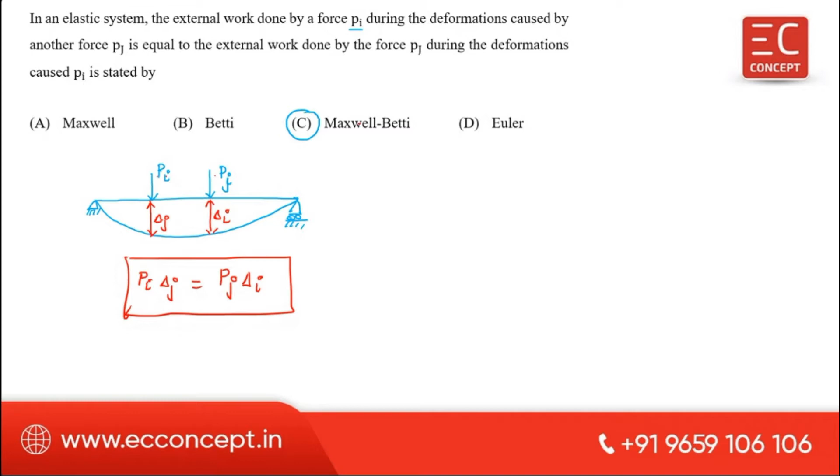What is this delta J? Delta J is the deformation under force Pi due to the force acting at this point. Due to this force, the deformation delta J. Due to this force, deformation delta I at this point. Then we can use the energy principle, load into deformation. So that is what is said by Maxwell-Betti's theorem. Okay. So answer is C.

Now next question. A simply supported beam of span 24 meter is to be designed to carry a central concentrated load of 200 kilonewton. If there is a 40 centimeter dip of the cable at the loading point from the neutral axis, the effective pre-stress is? They are asking effective pre-stress. A simply supported beam of 24 meter span. Designed to carry a concentrated load of 200 kilonewton.

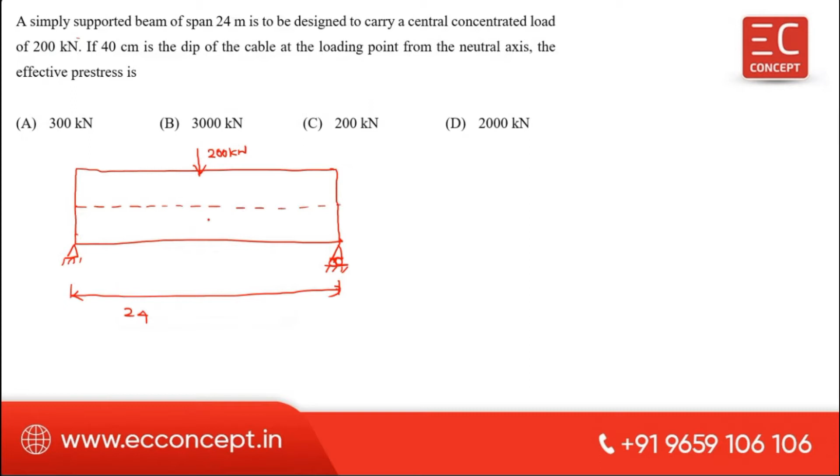A 40 centimeter dip of the cable at the loading point. So this is the neutral axis. Under the loading point, there is a 40 centimeter dip of the cable from the neutral axis. Then the effective pre-stress, this is the cable, okay? The effective pre-stress that was applied is P. Now we know the concept,

the moment due to this P at the center, that is P into e, load into eccentricity, is equal to the moment due to the point load, that is WL by 4. That is P into 0.4 is equal to 200 into 24 divided by 4. 24 by 4 is 6, so 1200 divided by 0.4 is equal to P. So P is 3000 kilonewton. Therefore, the answer for this question is B.

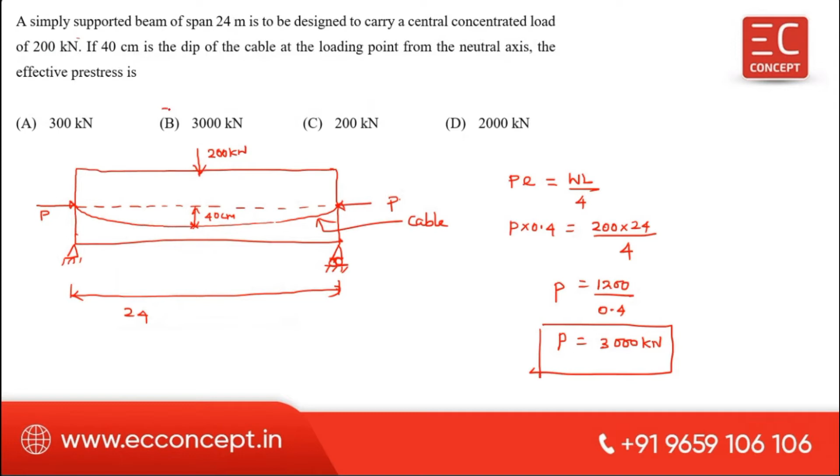Okay, next question. A steel plate 300 millimeter wide, 40 millimeter thick, is connected using 3 bolts of 24 millimeter diameter. The net cross-section area of the plate is calculated as follows. The breadth of the plate is 300 mm. They are asking the net cross-section area of the plate, but there are 3 bolts used: 1, 2, 3. At this section, what is the net cross-section area? And the thickness is 40 mm.

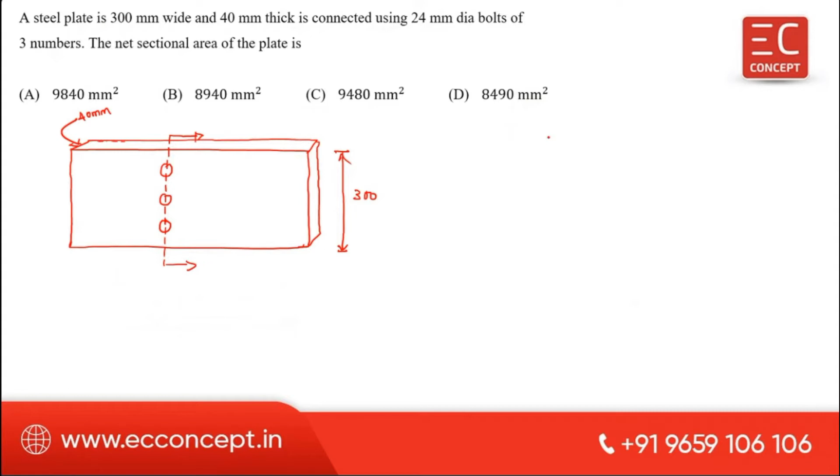So this thickness is 40 mm. So at this point, the net cross-section area A net is equal to total breadth minus number of bolts into diameter of bolt hole into thickness. Here, there are 2 things you have to remember.

For a rivet, up to 25 mm size, diameter of hole is D plus 1.5. Greater than 25 mm, D plus 2. So if the diameter of the rivet is less than or equal to 25 mm, then you have to add D plus 1.5. Greater, then you have to add D plus 2. This is the concept for rivet.

Next one is a bolt. For bolt, there are sizes 12 to 14 mm, 16 to 24 mm, greater than 24 mm. Diameter of bolt hole is equal to D plus 1, D plus 2, D plus 3. You have to add 1, 2, 3. Diameter of hole is calculated in such a way. But now here they have given the bolt, right?

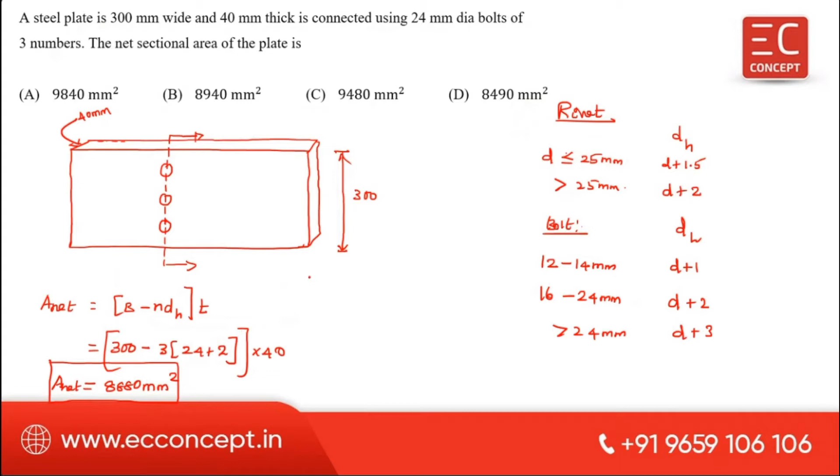So you are getting 8880 millimeter square. This is A net actually you will get. But we don't have this answer. I also checked this by considering the rivet instead of bolt. This question is somewhat vague in nature. As per my perspective, this question is wrong. But anyhow, I solved this question by considering this is the rivet instead of a bolt.

Now A net is equal to 300 minus 3 into the diameter of the hole. 24 is up to 25, so you have to add 1.5 only. Therefore, into 40. So 300 minus 3 into 25.5 into 40. So 3 into 25.5, 300 minus answer into 40. Now you are getting 8940. So this is the answer you are getting.

So we are getting this if we consider this as a rivet. But if we consider it as a bolt, then you have to add 2 with the diameter of the bolt, so that you will get 26. So 26 into 3, 300 minus answer into 40, you are getting 8880. But such an option is not there. But if you use this 1.5, by considering a rivet instead of bolt, then you will get answer B, right?

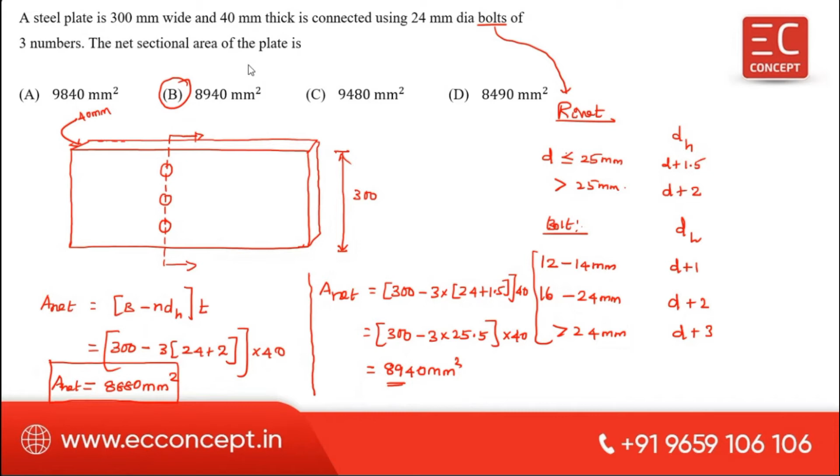Next one. The use of concordant cables in a pre-stressed continuous beam induces on the beam no initial support reaction. So this is the answer for this question. So I can write what a concordant cable profile means.

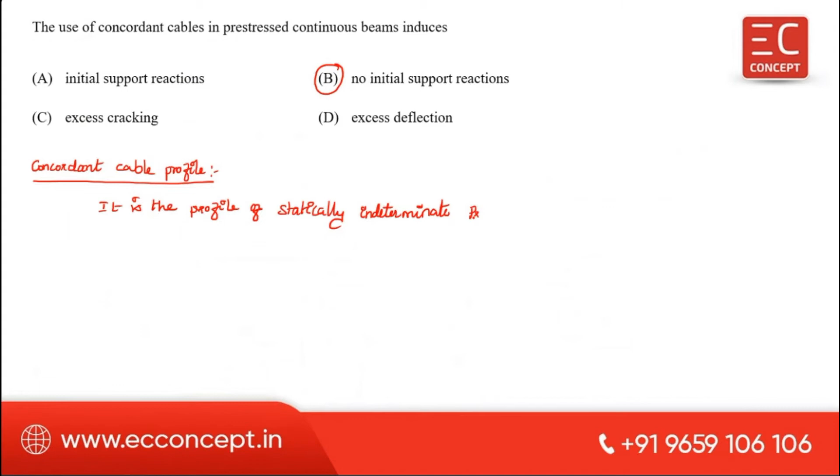It is the profile of a statically indeterminate pre-stressed concrete beam corresponding to which no secondary stresses and support reactions develop in the structure.

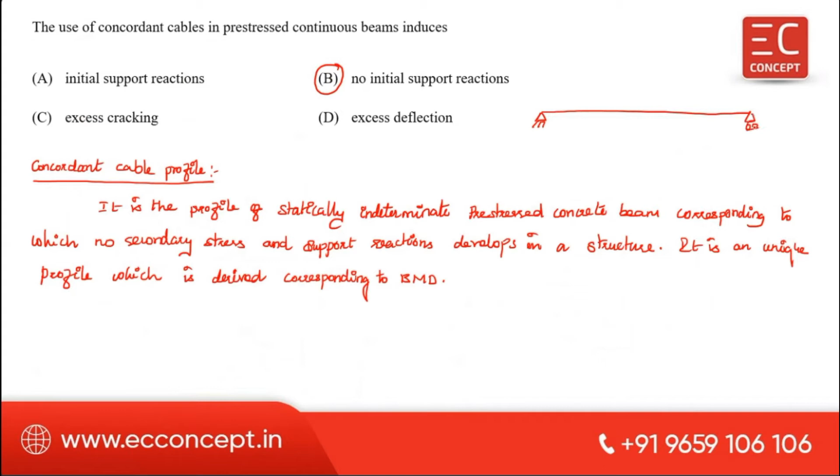It is a unique profile which is derived corresponding to the bending moment diagram. So the general meaning of this concordant cable is, suppose this is the continuous beam, and this continuous beam is having a UDL acting throughout the span. Then the bending moment diagram is something like this.

If you provide the cable in the shape of the bending moment diagram, then there is no support reaction and no secondary stresses come into play. Only the cable is subjected to stress. That means the beam will not be subjected to secondary stress and support reactions. Therefore, no initial support reaction is the answer.

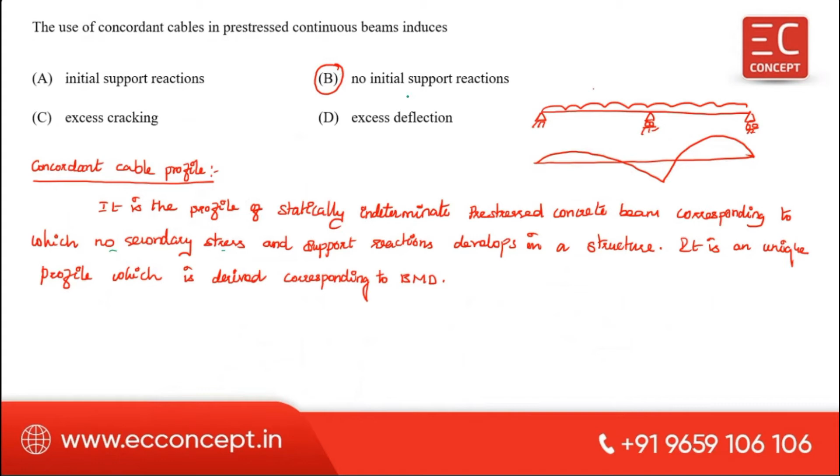Next question. The losses in pre-tensioned beams are more than the losses in post-tensioned beams due to. So the answer for this question is A.

Let me explain this. There are two losses in pre-tension members and post-tension members. The first one we can write as short-term loss, and another one is long-term loss. Then what is a short-term loss?

The first one is elastic shortening of concrete. That's the first one. Elastic shortening of concrete is a short-term loss. Second one is anchorage slip. Third one is friction. So these are the examples for short-term losses.

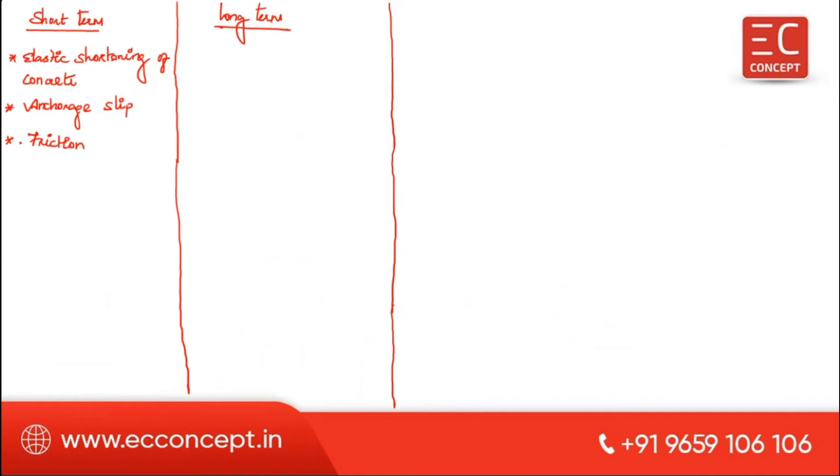Long-term losses: creep of concrete, and shrinkage of concrete. This is one long term. Next one is relaxation of steel. Okay, so these are the short-term and long-term losses.

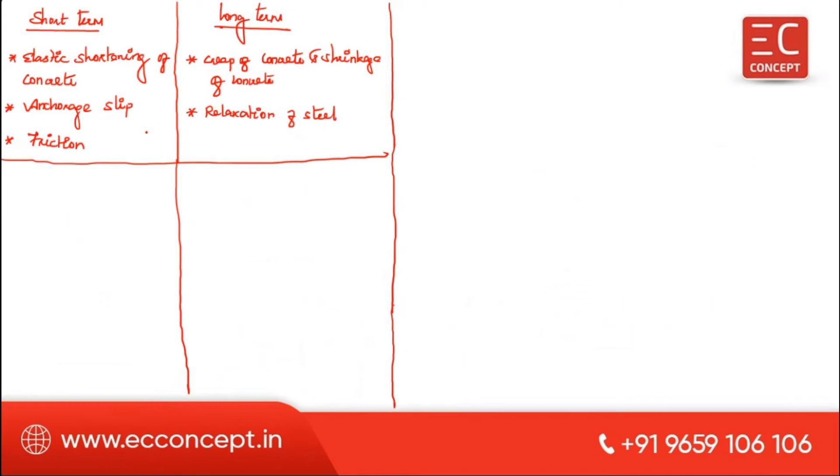Further, pre-tensioning and post-tensioning losses. What are the losses? The first one is elastic shortening of concrete. That is the first one, elastic shortening of concrete. The second one is creep and shrinkage of concrete.

Third one is relaxation of steel, also called creep of steel. This is the pre-tensioning member. Then post-tensioning member, be careful. One, losses due to elastic shortening of concrete is not present. Elastic shortening is not present.

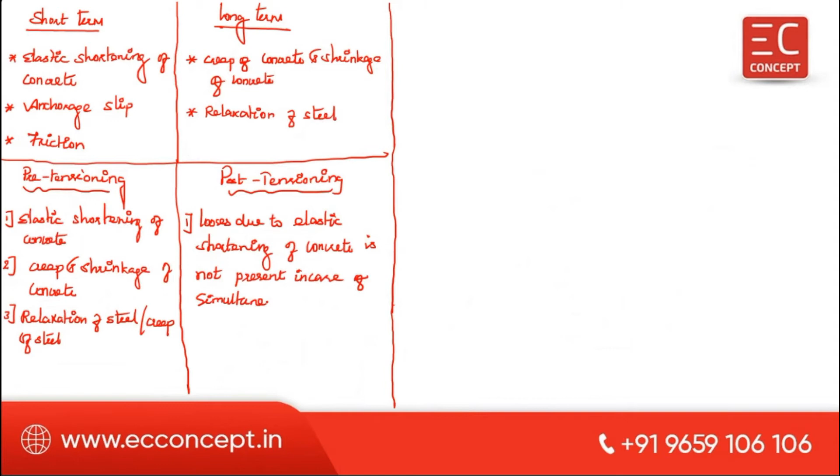Okay, not present. We can write some more: in case of simultaneous tensioning, there is no loss due to elastic shortening of concrete under post-tensioning. Okay, but it is present in the case of successive tensioning. And second one is all other losses. Now see, generally for post-tensioning, loss due to elastic shortening of concrete does not happen.

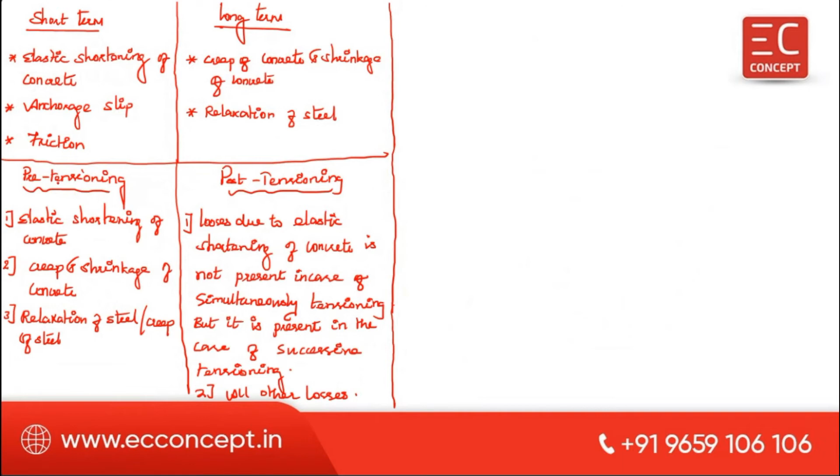Now you can see the question. Losses in pre-tension beams are more than losses in the post-tension beam due to elastic shortening, because in the pre-tensioning member one additional quantity is there, that is elastic shortening of concrete. But elastic shortening of concrete does not happen in post-tensioning. This is the reason for the pre-tensioning member the loss will be more. Understood? The reason is the effect of elastic shortening.

Next one is, a steel beam is replaced by a corresponding aluminum beam of same cross-sectional shape and dimension and is subjected to same loading. Everything same, only the material properties differ. The maximum bending stress now will be? We know that M by I is equal to F by Y is equal to E by R. Here F is the bending stress. F divided by Y is equal to E divided by R. Now there are two beams, right? The bending stress varies directly proportional to the Young's modulus. So we can take D as the answer: vary in proportion to their modulus of elasticity. Okay.

Now the next question. The base plate of a roof truss is attached to the concrete pier with the help of a 16 mm diameter anchor bolt of grade Fe 250 megapascal. What is the maximum pull that can be subjected to if the root dia is 0.75 times the shank diameter? So this is the base plate attached to the concrete pier, with the help of 16 mm diameter bolt. What is the maximum pull if the root dia is 0.75 times the shank diameter?

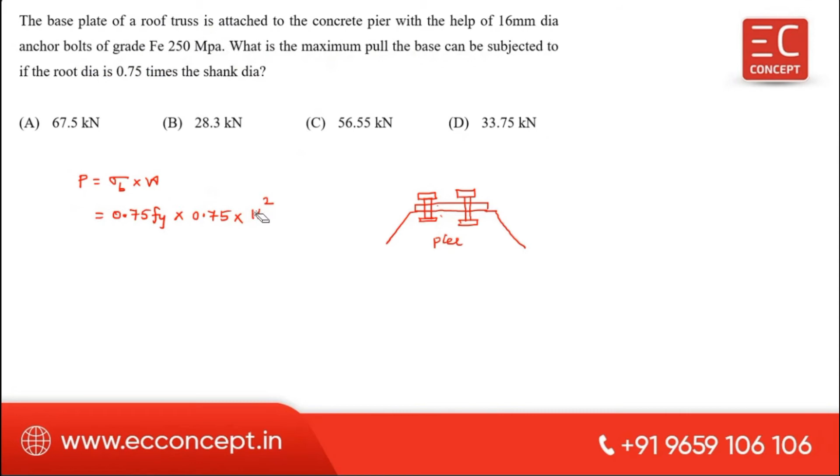So we know that because of the load, this bolt is now subjected to bearing action, because this base plate produces the bearing force on the pier. So this bolt is also subjected to bearing force. Therefore we can write force equal to stress into area. What is the bearing stress? 0.75 into Fy. And the area: they said 0.75 times the shank diameter, which is given as 16, the diameter of the bolt. Pi by 4 into 16 square.

So if you simplify, 0.75 into 250 into 0.75 into pi by 4 into 16 square. So we will get the answer equal to 28274.33 Newton. In terms of kilonewton, 28.3 kilonewton. So answer B is correct. Now we can go for the next question.

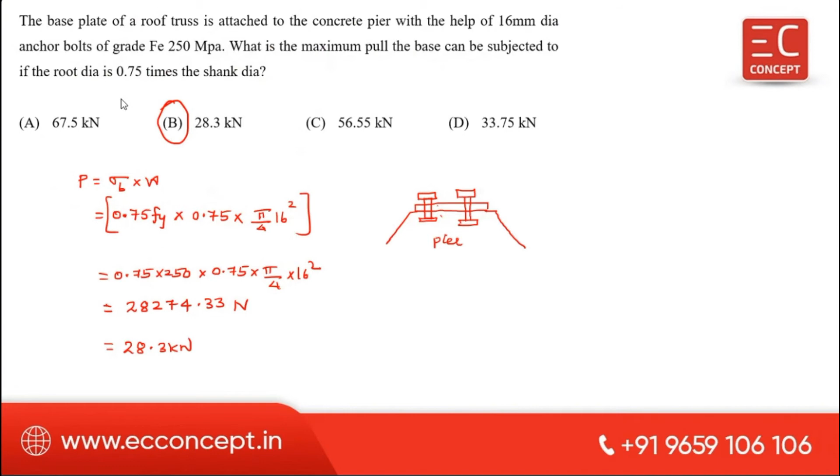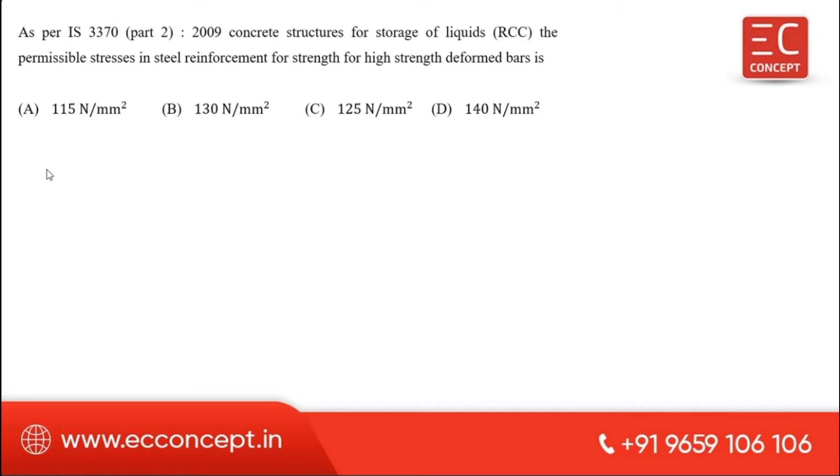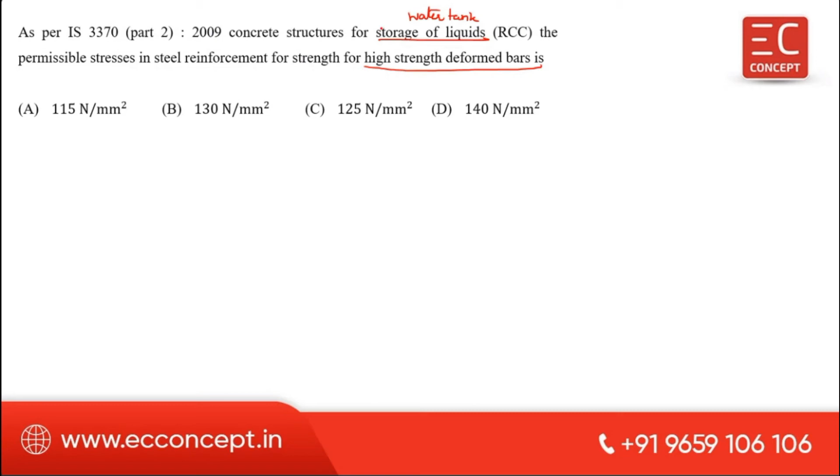As per IS 3370 Part 2 2009, concrete structures for storage of liquids, you can call it a water tank. The permissible stresses in steel reinforcement for high strength deformed bar, HYSD bar. Permissible stresses for steel: for mild steel, the value is 115 Newton per millimeter square. For HYSD bar, the value is taken as 130 Newton per millimeter square.

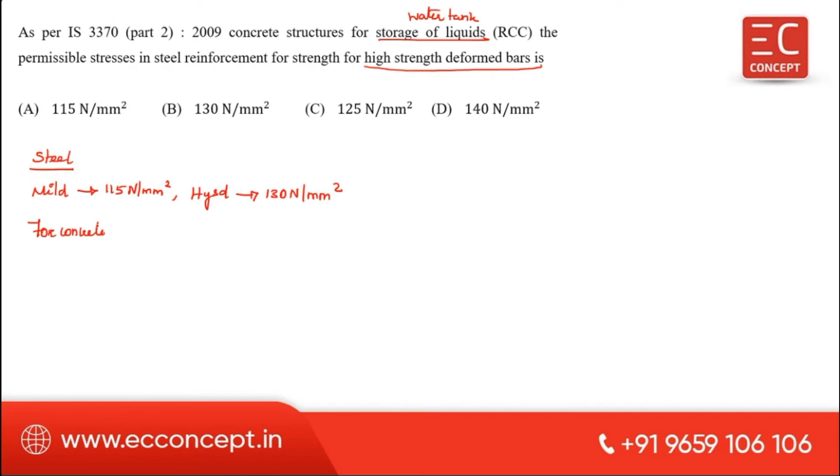Then for concrete, it is taken as M25, M30. This is for direct tension and bending tension. For direct tension, the value is 1.3 and 1.5. For bending tension it is 1.8, then 2. This is Newton per millimeter square. So the answer for this question: HYSD bar permissible stress is 130, right?

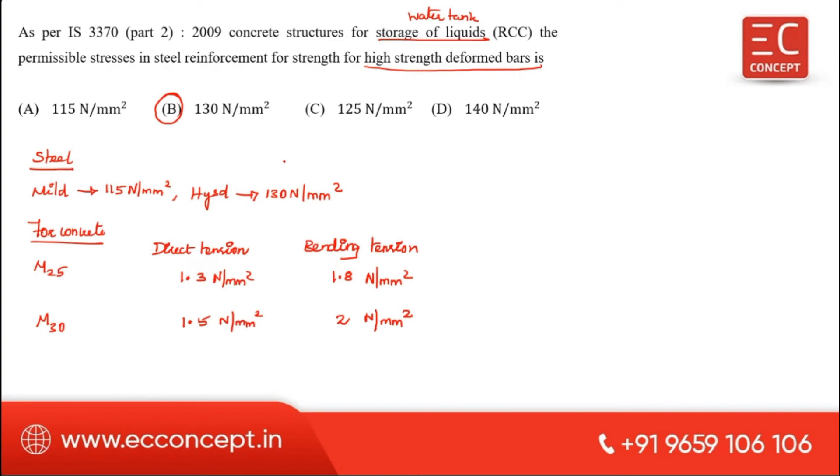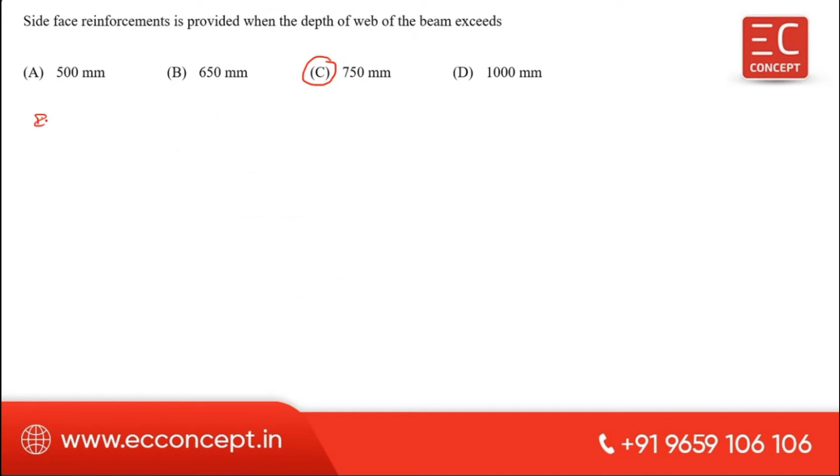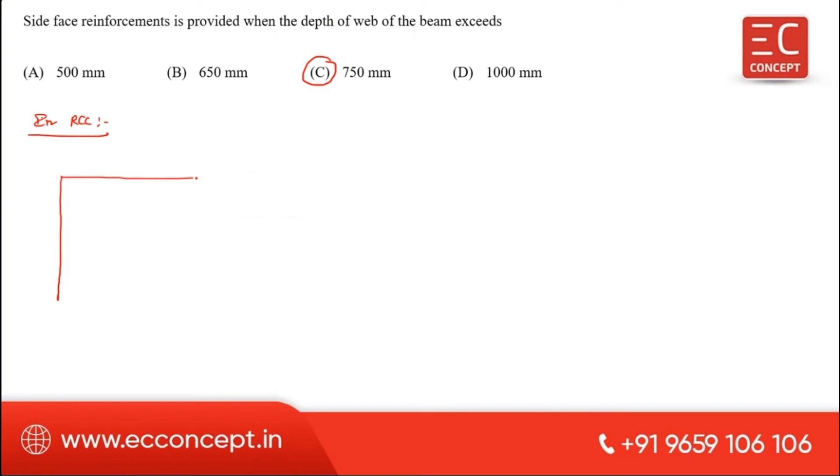Next one. The side face reinforcement is provided when the depth of the web of the beam exceeds 750. As per IS 456:2000 in RCC, if the depth of the web, this is the depth of the beam, is greater than 750 mm, then you have to provide side face reinforcement.

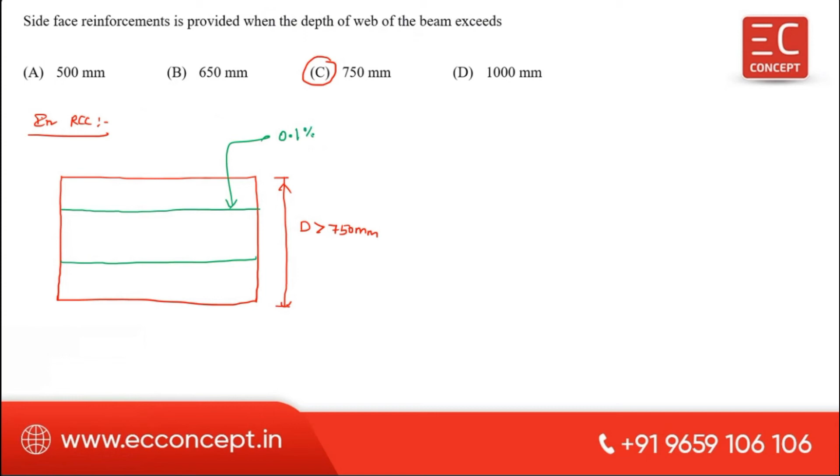Provide side face reinforcement of an area of 0.1 percentage of gross area of web, equally distributed on both sides, and the spacing shall not exceed 300 mm. So this is for RCC.

And in pre-stressed concrete structures, this will be used when the depth of the beam is greater than 500. When the depth of the beam is greater than 500, then we will use the side reinforcement. But in RCC, we will use the side reinforcement when the depth of the beam is greater than 750.

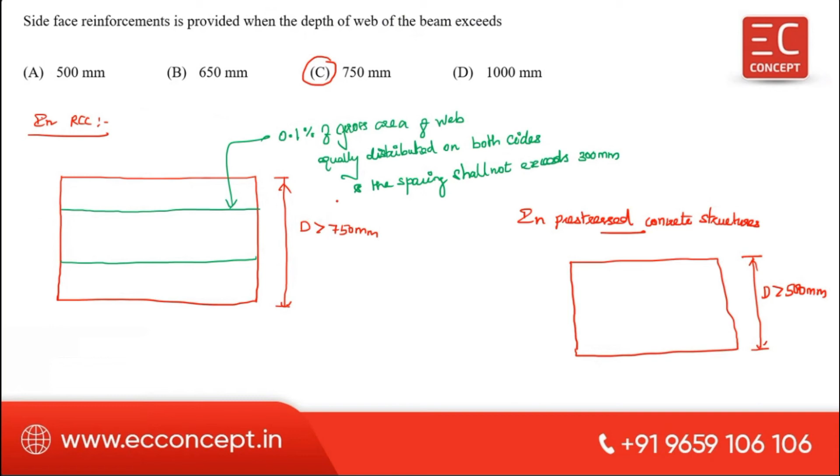Next one is, the depth of footing shall be designed for, very, very important, this is the factual thing, designed for shear, checked for bending moment. That means footing can be designed for shear and checked for bending moment.

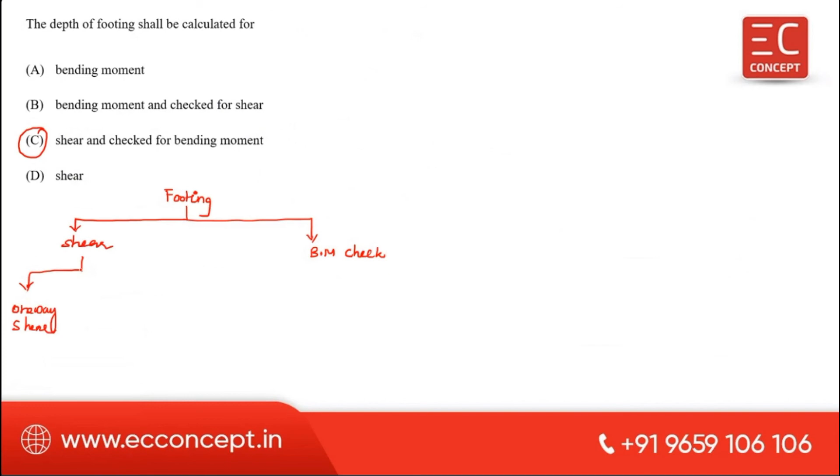There are two types of shear. One is one-way shear, another one is two-way shear. One-way shear is found at a distance of d from the face of column.

But a two-way shear is determined at d/2 distance from the face of column. Understood? That's the difference. So answer is C, correct.

The next question: as per IS 1172-1993, in the design of water supply scheme for a town with a full flushing system. Full flushing system means the people living in that particular area use a high amount of water, meaning they are a high income group or high standard people. Full flushing: the minimum water supply for domestic demand is 200 LPCD. Generally people will put 135 LPCD. Be careful, this is the full flushing system, 200 LPCD.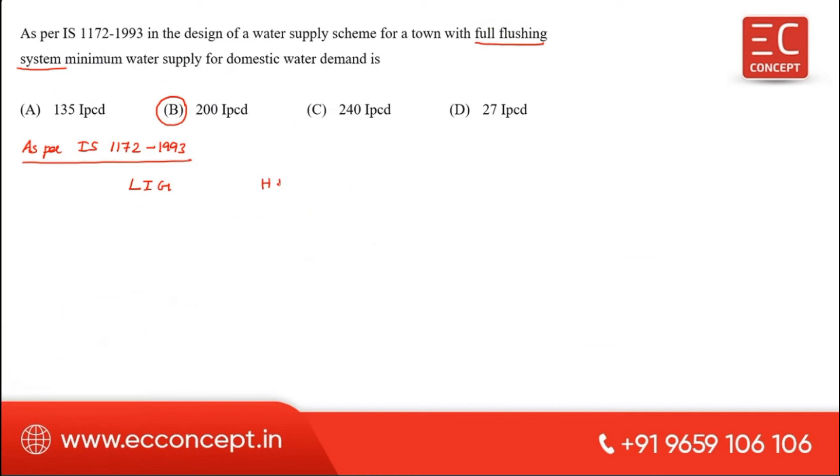As per IS 1172-1993, for low income group people and high income group people, domestic demand. So what is the value of domestic demand? Low income group, high income group. Domestic demand. Next one is industrial demand, commercial demand, public use demand,

waste due to theft and leakages. And the last one is fire demand. And these values are: domestic demand, fire demand, industrial demand, commercial demand, public use demand. So the domestic demand value is 135. For high income group, this is 200 LPCD.

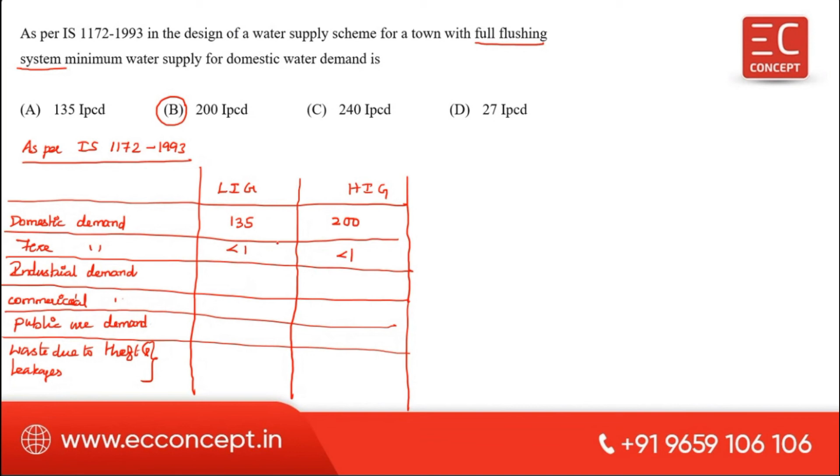So fire demand is always less than 1. Industrial demand 50, 50. Commercial demand 20, 20. Public use demand 10, 10. Water losses due to theft and leakages 55, 55 LPCD. So the total water demand for low income group is 270. This one is 335.

Footnote: for full flushing system, domestic demand is equal to 200. The high income group people only use full flushing system. For partial flushing system, domestic demand is equal to 135 LPCD. But in general, if they ask without giving full flushing system, what is the domestic water demand of a village in Indian condition, then you have to take 135.

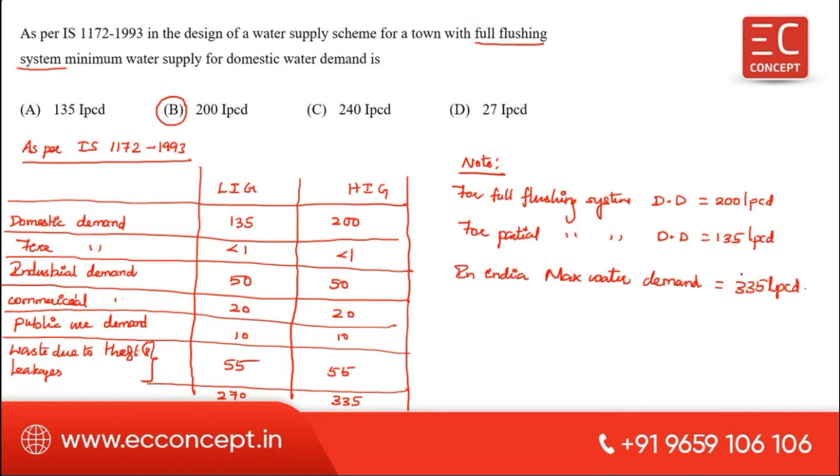Okay. In India, maximum water demand is equal to 335 LPCD at most. So the answer here is full flushing system, 200.

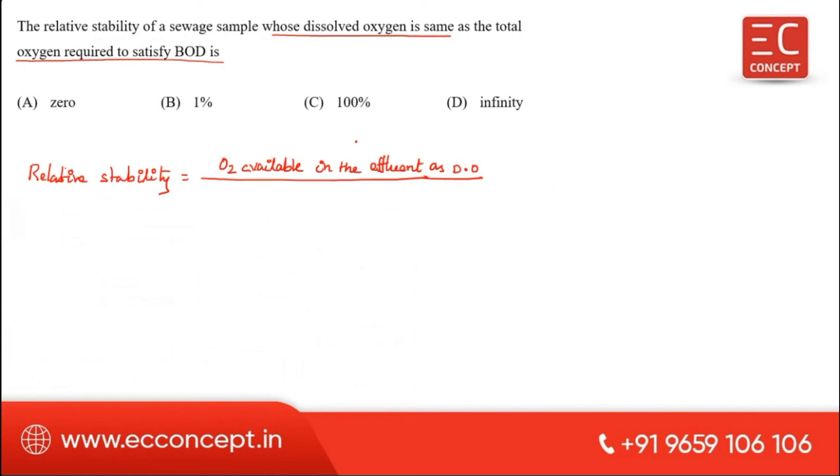Next one. The relative stability of a sewage sample whose dissolved oxygen is the same as the total oxygen required to satisfy BOD is. We know that the relative stability formula is the ratio of oxygen available in the effluent as dissolved oxygen to the total oxygen required to satisfy its first stage BOD.

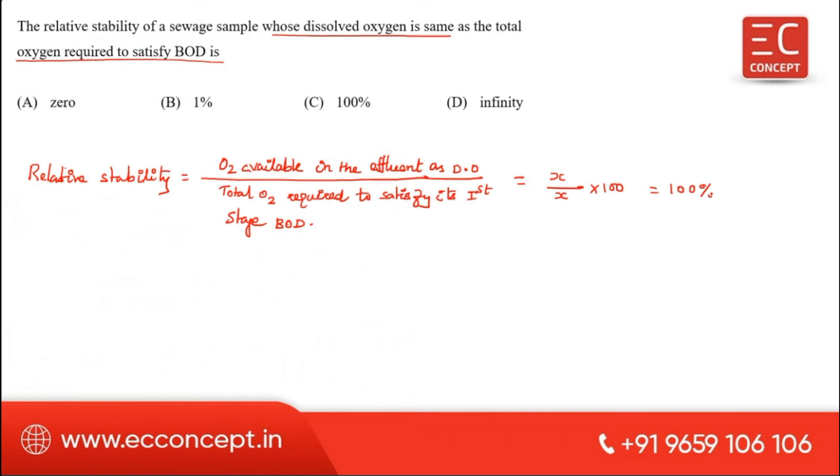Now you can write the relative stability. This is oxygen available in the effluent. Here, the sample's dissolved oxygen is the same, meaning the numerator is the same as the total oxygen required to satisfy the BOD. If you consider this as X and this also X, both are the same, into 100. Therefore, answer is 100%. And for relative stability, another formula is there, you can write it as SR.

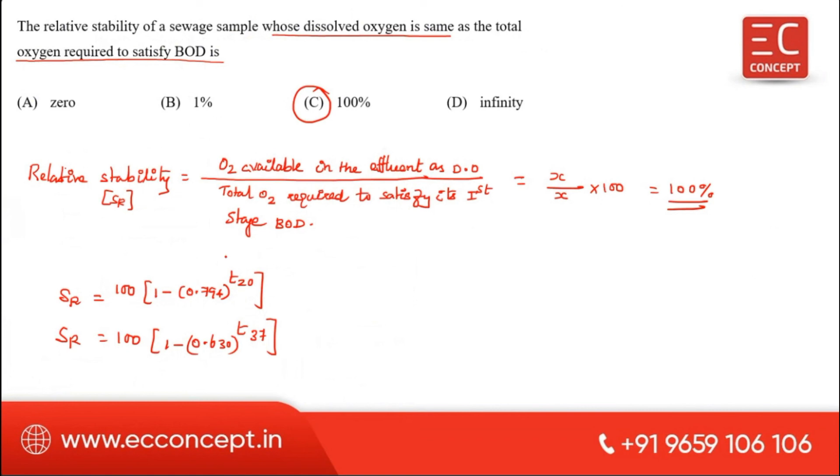Relative stability is equal to 100 into (1 minus 0.794^T20). Relative stability is equal to 100 into (1 minus 0.630^T37). This is time in days for the 20 degrees Celsius test run, and this is for the 37 degrees Celsius test run. This is the formula. This also may be a direct question in the examination.

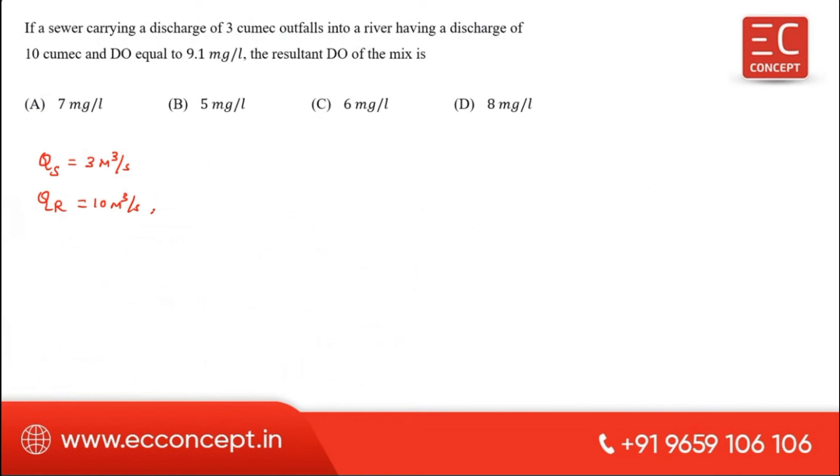Next one. A sewer carrying a discharge of 3 cubic meters per second, so sewage discharge is 3 m³/s, outfalls into a river with river discharge Q river equal to 10, and dissolved oxygen of river equal to 9.1 milligram per liter. The oxygen of sewage is 0, as no oxygen is given. Then they are asking the resultant concentration of the mix.

The resultant dissolved oxygen concentration can be written as (QS into OS plus QR into OR) divided by (QS plus QR). So it equals 10 into 9.1 divided by 3 plus 10, which is 91 divided by 13. So answer is 7 milligram per liter. This is the concentration equation. Be careful.